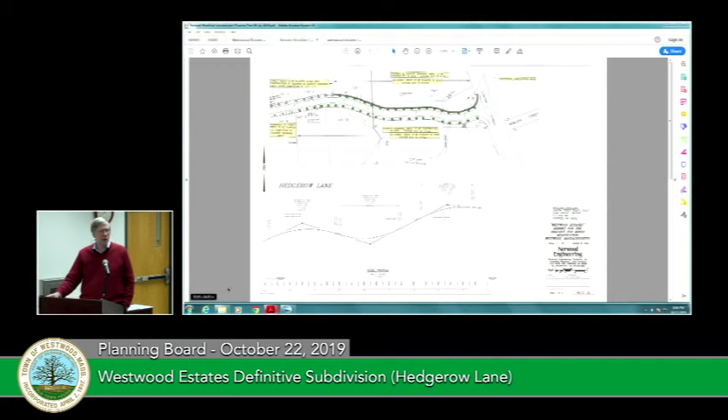This was last week. On the left side, you can see what's called the invisible curb. It's flush granite curbing that allows the water to run off the road rather than into a catch basin, in a Cape Cod berm type situation. It overflows into the country drainage swale, which you can see has been sodded, not just seeded, so it's in very good condition.

On the right side is looking from within the subdivision out towards Canton Street, and you can see the street trees along both sides of the hedgerow.

On the left side is the country drainage swale under construction. It was the day we were out there taking the pictures. It was loamed and being prepped for the sod. On the right side, you can see the cut slope related to the drainage, and again the invisible curb and the pea-stone diaphragm that slows the water down and allows some infiltration before it hits the swale.

Again, this has all been sodded, and this activity is pretty much complete up to Lot 9 on the southerly side, where there's an existing house. That sidewalk goes from Canton Street—on that side there is no sidewalk. So the street trees and curbing have gone up to beyond Lot 9.

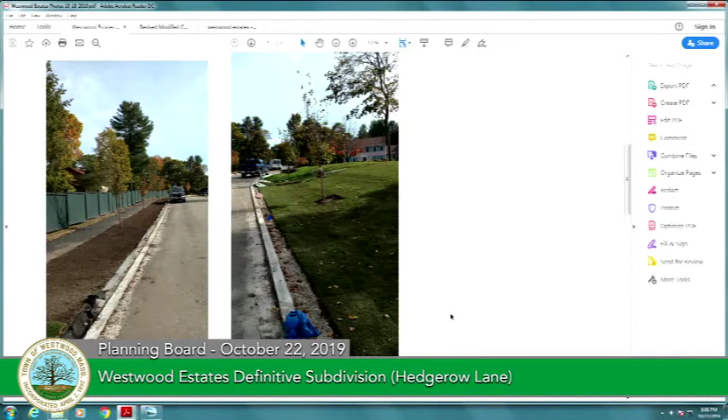On the northerly side, or the right side, going up the street, the sidewalk, curbing, and drainage have been completed. Did I also send you a copy of the head walls?

Yes. At each of the driveway crossings, the concept of the country drainage is, rather than having a Cape Cod berm or granite curbing to channelize the water down to a catch basin, the water is discharged over that granite curb, which when we put the top coat in will be flush with the finished pavement. The water runs across that and down into the swale.

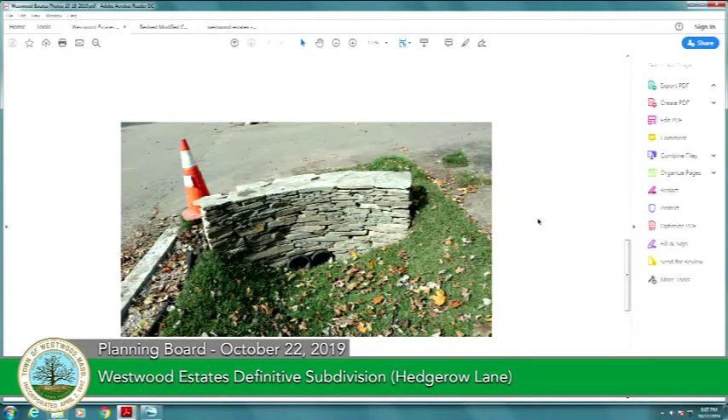At each driveway crossing, there are two 8-inch diameter pipes to get the runoff down to where it's disposed. There is a pitch to this—it's not a flat swale. At each of the driveways, we have a fieldstone head wall on each side to improve the appearance of the subdivision and give it a nice finished look rather than a concrete head wall.

So that's where we are. We've done essentially what we said we were going to do at the previous meeting, and there's the pictures of what's been accomplished over the last two weeks.

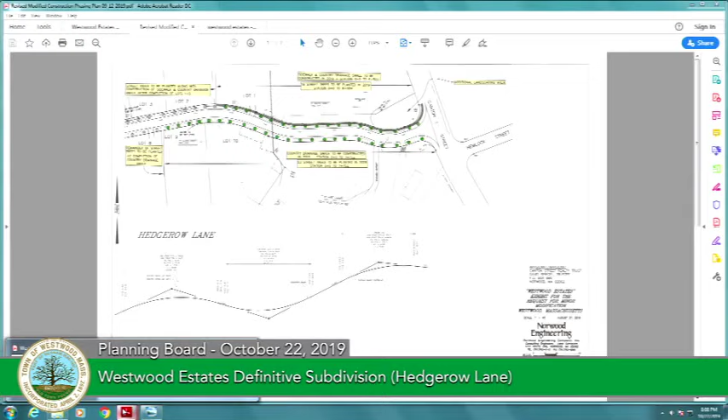Thank you. Anything additional? Okay. One question—will the country drainage be sodded all the way down? Is that the plan? Currently, I believe so.

Okay, and then a few questions regarding the sequencing. If you could pull up the plan itself where you see lots 1, 2, 3, and toggle back and forth, going through a few scenarios. So what happens if lot 4 sells today and you're building a house? The way it's presented now is that the sidewalk and street trees would be planted in front of that house, as shown on the plan, at the time the house is completed, to prevent any damage to the trees.

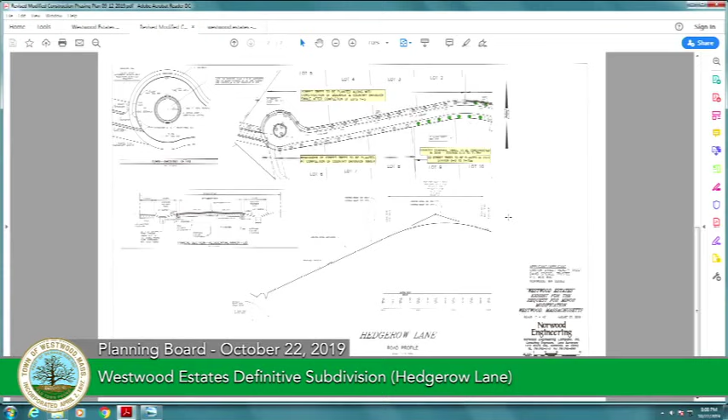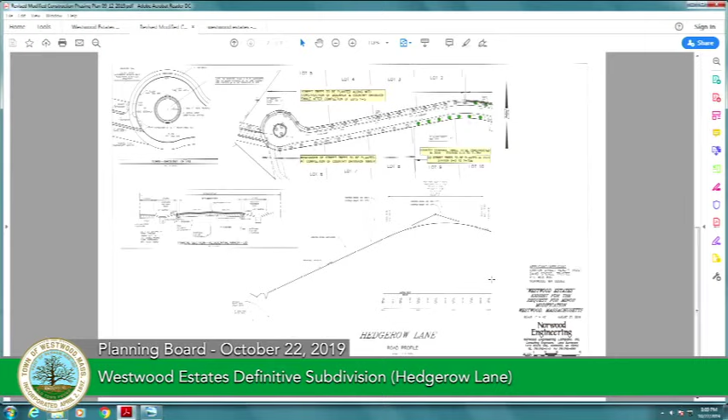And that portion of the sidewalk would be constructed. So in that situation, where lot 4 is sold, lot 3 and lot 2 will not have sidewalks constructed. Correct.

So the sequencing is that once the house begins construction, the gas company will come in and do the work getting the gas service to the house. The house will be built, and on completion, the street trees will be planted and the section of sidewalk installed. Otherwise, we're back to what we're trying to prevent—putting a sidewalk in just to have it torn up by equipment or the gas company's installation.

So then what is your response to pedestrian safety for lot 4? Lot 4 buys a house, puts a sidewalk in front of their house, and now they're essentially walking in the road—let's say they have a dog, or a child is walking up the street, like for a bus pickup.

So how do you deal with pedestrian safety without a sidewalk in lots 2 and 3 for that situation? They would use the road, which is a low volume road. It's only a 10-lot subdivision.

There are two lots that would be serviced by the existing sidewalk. Lot 1, the sidewalk goes to lot 2. So at the time lot 2 is built on, there would be pedestrian access from lot 2 out to Canton Street. There is no sidewalk proposed on the southerly side.

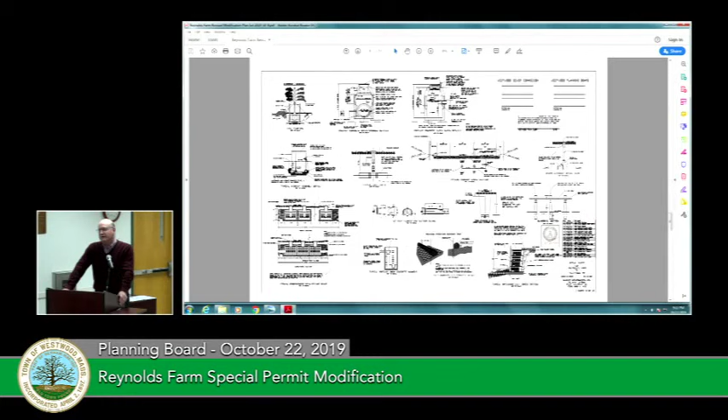Is that number 11 on this drawing, just to clarify? I think so. It's these 2 buildings here, between 10 and 11. Sorry about that. A lot of these drawings were done previous to numbers being assigned, so the last two buildings, it's those two units, 10 and 11. And so it's unit 11 that had either potentially an issue or had an issue.

So when we were out there a couple of springs ago, and I sort of, probably without thinking of it clearly, Ed had installed what we call an area drain, just a drain in the grass with a grate on it, and it discharged through a 4-inch pipe down into the drainage basin. So I quickly said, yeah, well, the best thing to do here is to take the rooftop drains from those two units and put them into that area drain, because the rooftops make most of the runoff. Grass, once it's well established, has very little runoff, even in heavy rainstorms.

So that was put on the modification plan that you voted on a while back. But when Ed actually went to build it, and he was asking me about the layout, I started thinking about it and said, Ed, that's a mistake. Because that area drain only has a 4-inch pipe draining it, and second, it has a grate on top. So should the water come faster than anticipated, or should that grate allow silt, sand, and grass to get in there and plug that pipe up, that would actually exacerbate the problem rather than cure it, right?

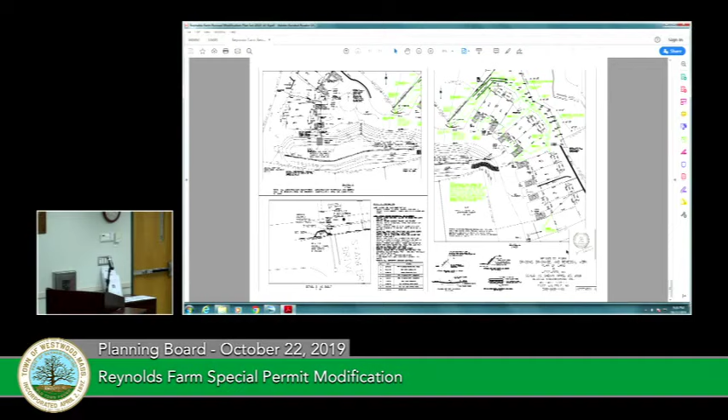So there's a proposed wall in this location here. So yeah, this actually says 43. You want to just, when you go - you just might grab the microphone. Sorry, once I see it, now I can remember.

So there's a proposed wall along the left side of Unit 43, where the ground rises up quite significantly. Probably you've all seen that. So we showed a wall back to back with 4 feet in between it. What Ed's finding out is that the block they want to use, the size and weight of the block, the manufacturer says you need 8 feet in between those 2 walls. So he's asking to have the wall moved slightly towards the unit.

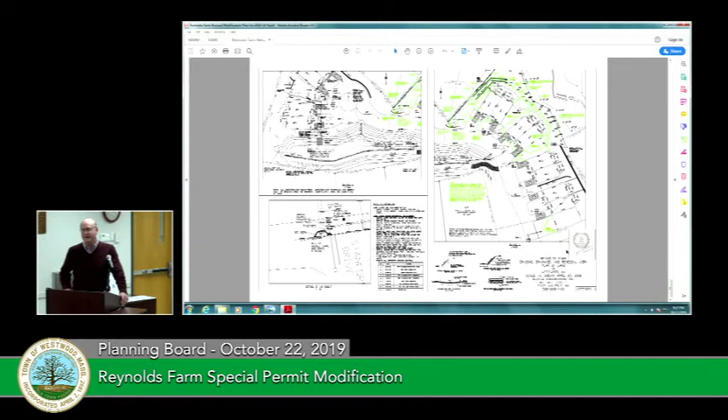And are you going to move the other wall away a little bit? The other wall away a little bit so that there would be a separation of - so each wall is no more than 4 feet high, and then there'd be a separation of 8 feet between the 2 walls. So those are the 3 requests, and myself or Ed could answer any questions you might have. Oh, sorry, wait, one more thing.

On the backs of units 41 and 33, there was a scrivener's error on the plan. The details showed a 4-inch pipe going into a 4-inch fitting, but on the plan view, it showed the 4-inch pipe going into a 6-inch fitting. Well, all of the downspouts are 4-inch pipes coming out because a gutter can't carry more than what can go through a 4-inch pipe. So the detail on the set of plans always shows a 4-inch pipe and a clean out at each downspout. But when there's 2 connected to each other, then we go to a 6-inch pipe. When there's 3 connected, then we go to an 8-inch pipe. So all of the piping has been laid out in that manner.

Thank you. Abby, are there any staff comments?

Yes, I do not support the request for the reduction in the size of the trees. Special permits require the 4-inch caliper, and the planning board has been consistent with that. Your subdivision rules and regulations allow a smaller size, but this is not a subdivision, it's a special permit. So since it's been quite a while since this project was first approved, I would recommend keeping that 4-inch caliper size because that's important to the residents that live there and the abutting residents.

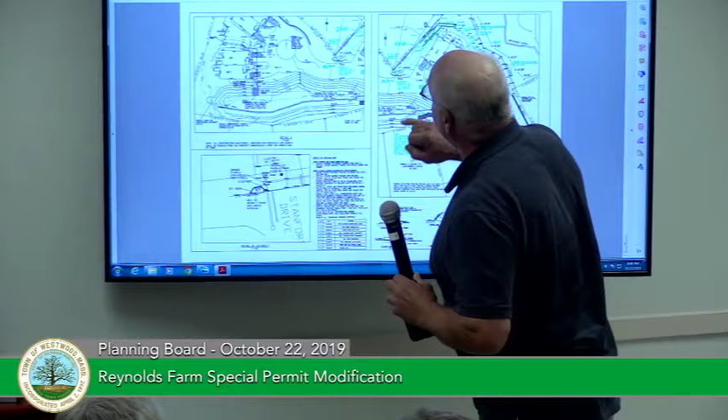It states right here: install maintenance vehicle access path as shown on the approved plan. We put a call for gravel here. Where is it? It's not on here. Anyways, it describes this as being gravel. This is the continuation of the path. It was intended to be a service access to the detention basin. This was recommended by the chairman of the Conservation Commission.

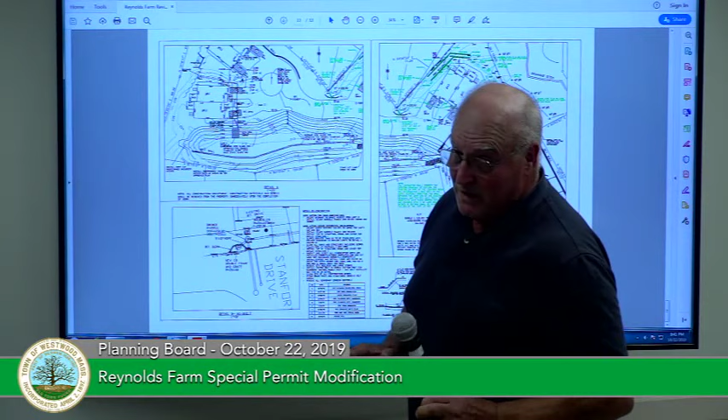No one is ever going to go into that basin to do maintenance on it. My contractor is now taking off 3 to 4 inches of the gravel and replacing it with loam. My point is, it was only intended to be a service access path, not a pedestrian path or a dog walking path. So he asked me what to put there, and I told him, put gravel there, based on this — service access, not a walking path.

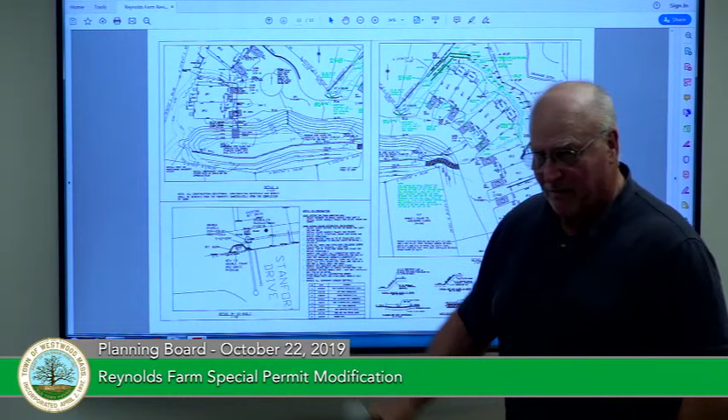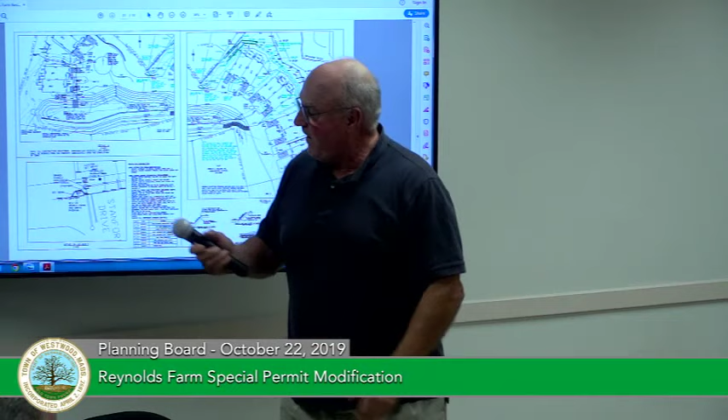A couple of the unit owners didn't want grass there, a couple of the trustees wanted grass there, so we got caught in this crossfire. My guy's taking it out, taking 4 inches of the gravel out, and we're going to put loam there and seed it.

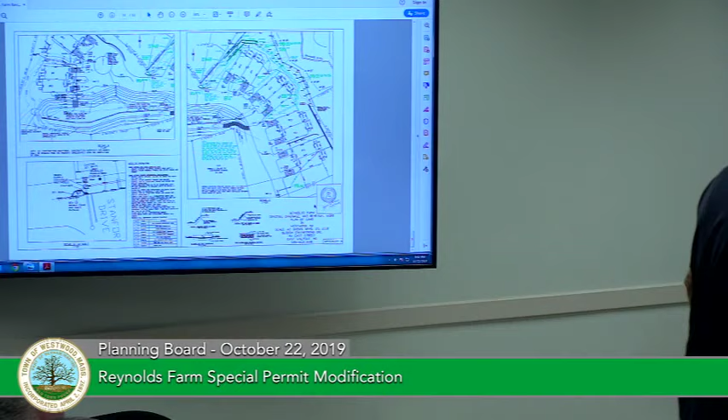Hi, I'm Janet Baldessari, 31 Reynolds Farmway. First of all, it was interesting listening to the hedgerow situation, because although I understand Dave and Chris's attempt to move forward quickly, I certainly understand you wanting to get into the minutia and do due diligence, because this is where we are at — due diligence wasn't necessarily taken, not by the planning board, but by many different parties.

In terms of the access path, the main thing is, no matter if some owners wanted grass and others wanted loam or gravel, it's not stable. The last rainstorm we had, a river was running through it. I pointed that out to the builder. It's got to be stabilized. So whatever you guys have to do to make that stable — maybe making it a firm, solid piece of seeded loam would make it more stable. I don't know, but it's not stable, it's going to fall apart. A river ran through it with the last rainstorm.

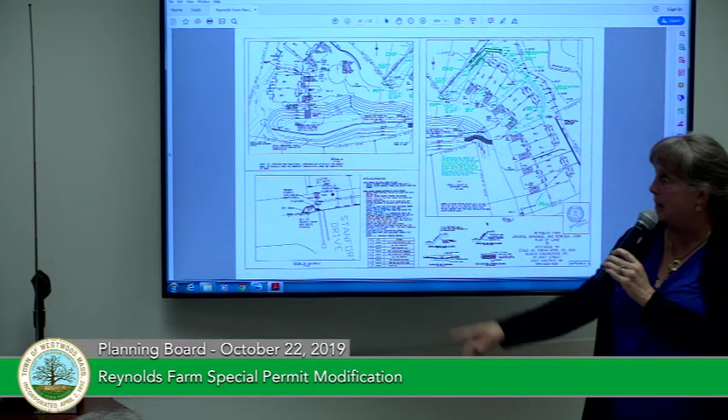I don't know if this detail... yes, there's a line right here that says from this side over, it's to be riprap, and from this side over, it's to be natural grass. So the riprap was not put in at this point, it was put in somewhere back around here. So as long as the developer makes it clear he will fix the riprap according to this plan, and as long as he will loam and seed the path as the two engineers agree should be done, then I don't think that's a problem. You don't need to change the plans. But you should just confirm the plan will stay as is shown.

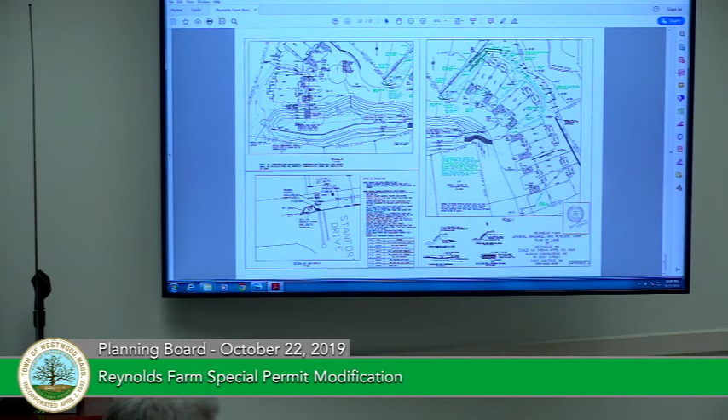He's nodding, he's changing it - he's removing the gravel from the path. We're using it elsewhere. It's going to take about 4 inches of gravel off of the path, which is intended to be a service access path. It will be replaced with loam. So Ed has agreed to that. And the riprap - I haven't heard him say.

I read a 20 scale instead of a 30 scale, that was just my fault. Okay, just for clarification, you said loam and seed. Loam and seed, got it. Yes, well, there's no reason to put the loam down if you're not seeding it. I hear you. So I think we're done.

One other item on the plants, they're related. I wanted to give Phil an opportunity to comment on the variety change, so you can weigh in on that.

I think we're all in agreement that the height change should not be altered. Since the 4 inch requirement didn't change, then if you keep with that, the request—which was not rightfully before you because it wasn't submitted by the applicant—is from their nursery to allow 18 of the 22 varieties to be replaced with varieties they have on site. Beta has reviewed that, and if Phil wants to comment.

I thought that was part of our second vote, to require that they stick to the 4 inches and the varieties. His motion said stay with what... right, just thought. So I wanted to give you—we reviewed the requested changes based on your email, right?